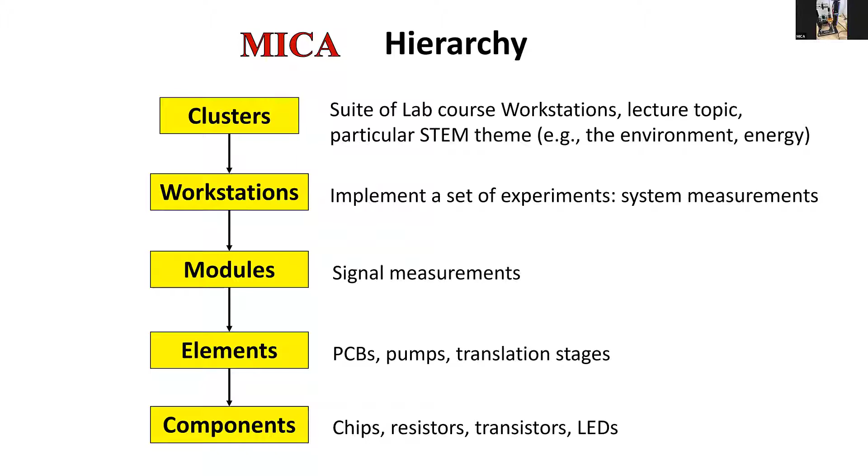So we think of MICA as being a hierarchical system where we go from the lab course workstations, the benchtop systems that students can interact with that may be focused around a particular STEM theme, the environment or energy. Then we have modules that encompass the capacity to signal measurements. We have elements, and then we have components.

And so these are examples of various mechanical components that we would have in a MICA workstation, the motors and actuators that we may need depending on the particular focus of that workstation, the hydraulic components, optical components, again, depending on the particular system that we've developed, and then the various electronic systems that we've used.

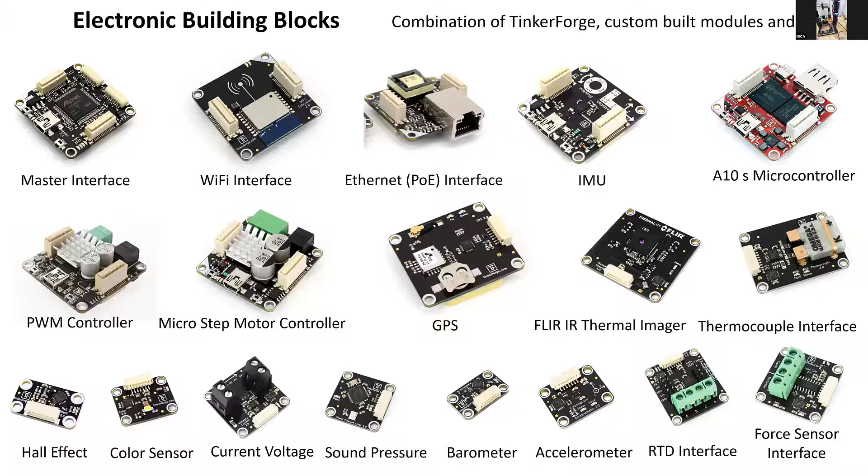We use both TinkerForge and custom-built modules that enable us to control motors, to acquire thermal images, to make measurements of sound pressure, atmospheric pressure, accelerometers, and so on.

The structural components are Misumi elements that we can put together using brackets to give, again, a footprint that is standard. A maximum size then enables us to put these together in a way that they can be shipped and sent to particular places if we need to provide them to other researchers who are interested in using them.

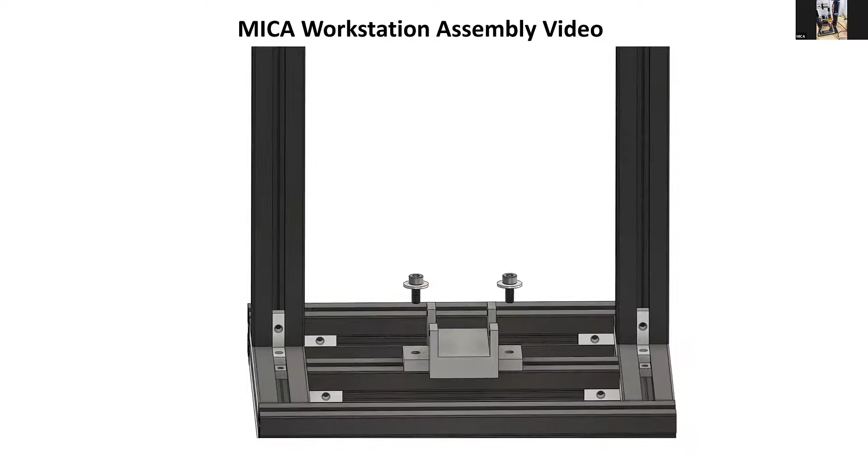Now this here shows that particular workstation being built in a CAD environment. So for those courses where you want the students to actually build the workstation that they're about to use to perform experiments, we can provide you either with a video like you're seeing now of it being built, or even better still, a CAD model.

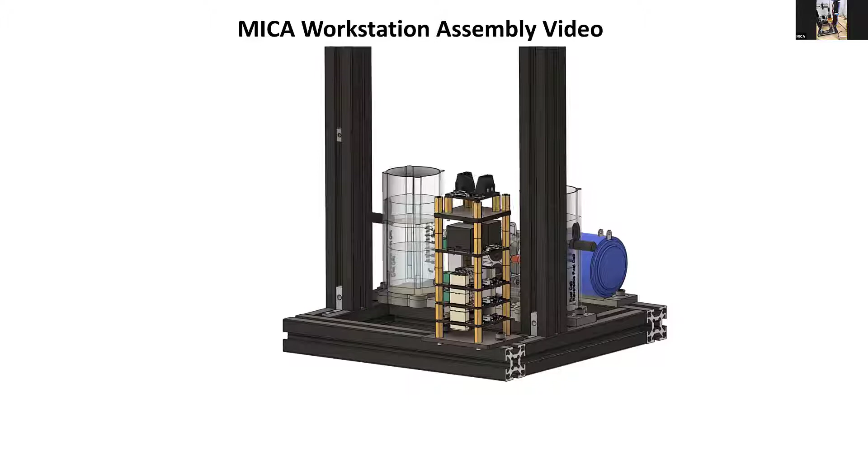In the CAD system, it'll show you the system being built. That allows you to start and stop it, which you can do in this video, but also if you want to zoom in or move around, doing this in a CAD environment rather than via video is way preferable.

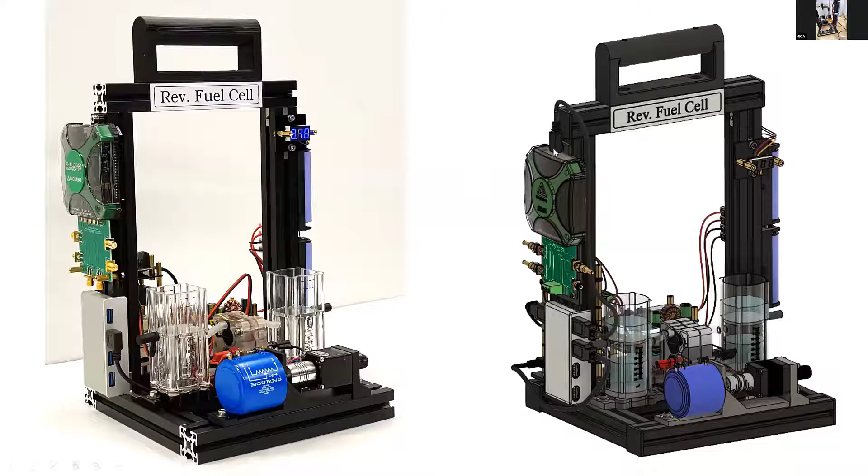We've also been experimenting with the use of Google Glasses and other 3D displays to enhance the three-dimensional visualization of these workstations. So this is an example on the left of the actual workstation that was built, and on your right is the CAD model of that workstation. You can see in the CAD model, we've got even the wiring present in the model.

All of the workstations are driven normally just with two 21700 cells. These are the cells that are coming off Elon Musk's battery manufacturing gigafactory. And what's interesting about them is they're 50 kilojoules each. So with two of them, you've got 100 kilojoules.

For some of the setups, this is nice because students, if they know how much power is being consumed during an experiment, can calculate how many joules you have left in the batteries. So it allows the students to start thinking about some of the system level issues around energy management. Here's just a close-up of part of that workstation.

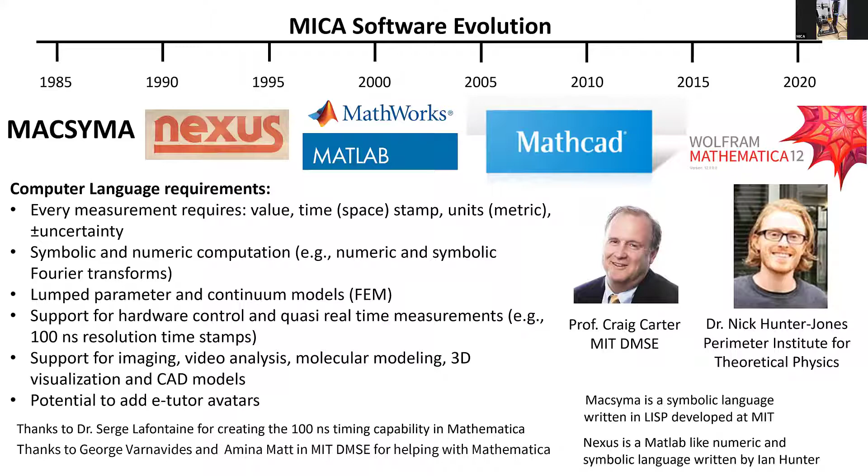I'll just skip over that, it's not necessary. This slide is really just to drive home the key modeling needs that we have: the need for lump parameter models, such as you'd have in typical control systems, Bode plots and transfer functions, and then for nonlinear lumped parameter dynamic modeling, Volterra series expansion, Volterra kernels.

We also wanted to make sure that we had continuum modeling, finite element modeling, and Mathematica in particular has very recently got a relatively powerful finite element modeling capability, which interestingly, most finite element modeling packages are numeric. Think of computational fluid dynamics being entirely numeric.

Mathematica, because of its symbolic capability, allows you to have combinations of continuum models that are solved numerically and, for a more limited set of cases, symbolically and therefore exactly. You can do molecular modeling, DFT, as well as neural nets and deep learning.

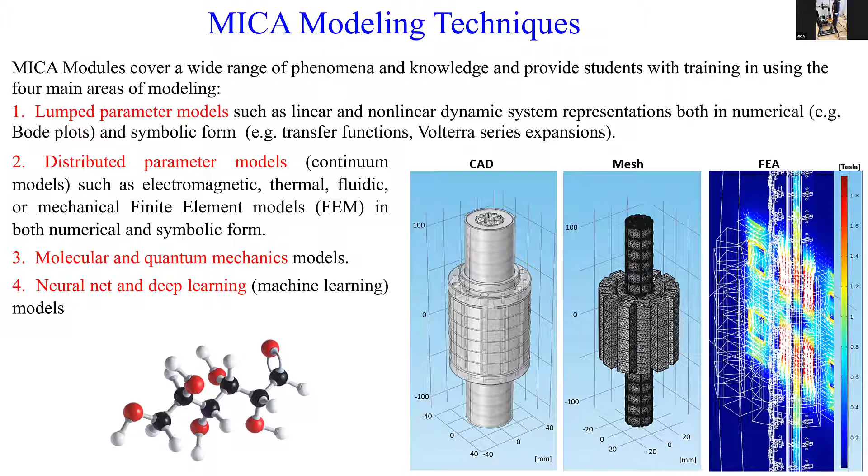The virtual tutor is something that we're working on. It's going to take some while. We're pairing up with Weta, the New Zealand company famous for its work on Lord of the Rings, Planet of the Apes, Avatar and a whole bunch of other movies. So we're working to see if we can use that Hollywood-style realism achieved in those movies to bring that into MICA as a virtual tutor.

I might add, our ultimate goal in MICA is to eliminate the need for traditional exams or multi-choice tests, and to use the actual physical workstations where students are running experiments, but where the workstations can pose questions and effectively perform experiments on the students, so that the workstation itself starts building a model of the student's knowledge in a particular area.

So we like to think that eventually the e-tutors are not only there to help with the teaching and to resolve questions, but also that the e-tutor is busily modeling the student's knowledge and trying to learn their preferences, so that if, for example, you're keen on music, then perhaps you teach periodic phenomena and resonance via music, whereas if you're into sports or something else, the method by which you're presented material would be somewhat different.

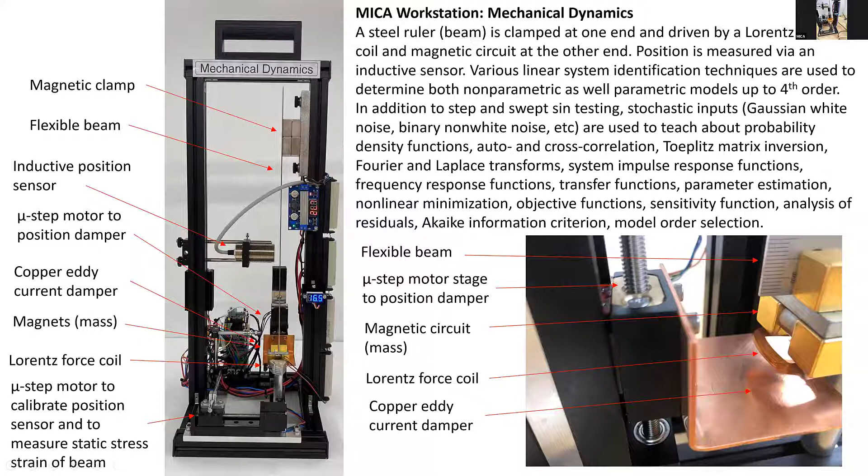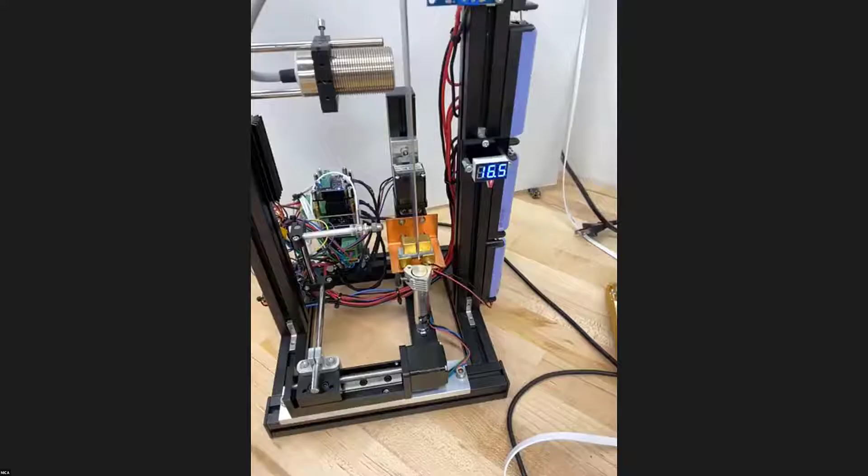So I'm now going to do a demo of this. I'm just going to stop the share screen and move over to the Mathematica analysis environment, which is actually going to run the experiment. Then in the other screen, labeled MICA, you're going to see the actual setup.

So maybe if we can just switch over to the MICA screen so we can see the experiment being run. Ian, I think you might need to stop sharing your screen for that to work. All right, I'll do a stop share. Ah, there we go, excellent.

So this is the beam here that's got the Lorentz force actuator on the end of it, and we're now actually going to generate a stochastic binary signal that's going to be used to do a dynamic experiment on that beam, and then we're going to use linear system identification techniques to actually characterize the behavior of that system.

So if we can now go back to the other screen, we'll bring up the lecture notes. There we go. So this is what the student would see. There's a little bit of background that they would go through.

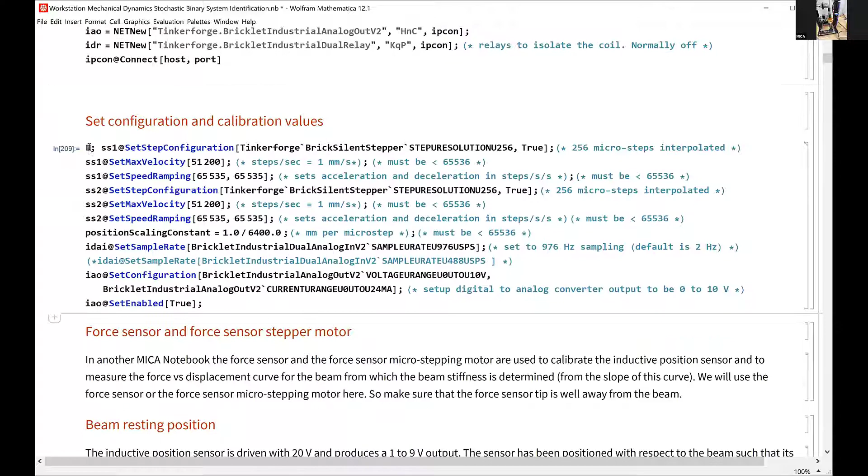Here, what we're doing is making, we're going to analyze these data, run the experiment and then analyze the data in real time. We're just setting up the A to Ds and D to As and the other micro-stepping motors and other entities that we need. We're just checking that we've got an offset that is roughly 5 volts, offset voltage.

And now we're just going to do a quick measurement to get the baseline noise measurements of this system. And here they are, right here.

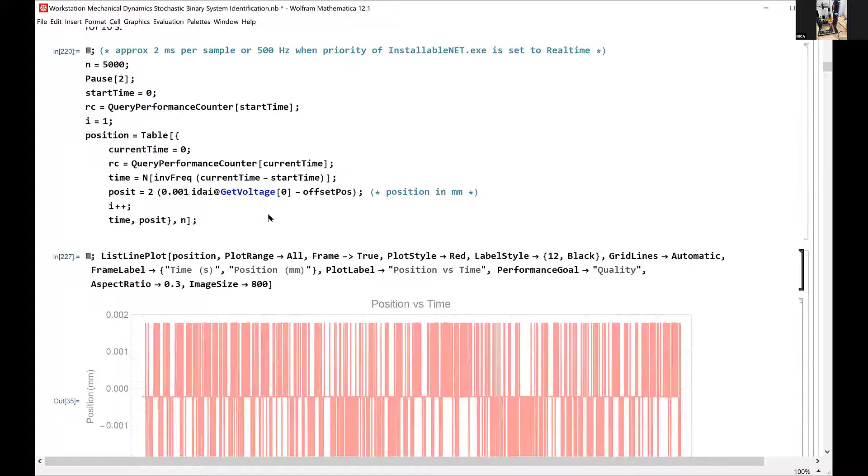So just so that this is truly in real time, I'm going to delete all the output here and rerun that, because I want to show you that we're actually gathering and analyzing the data in real time.

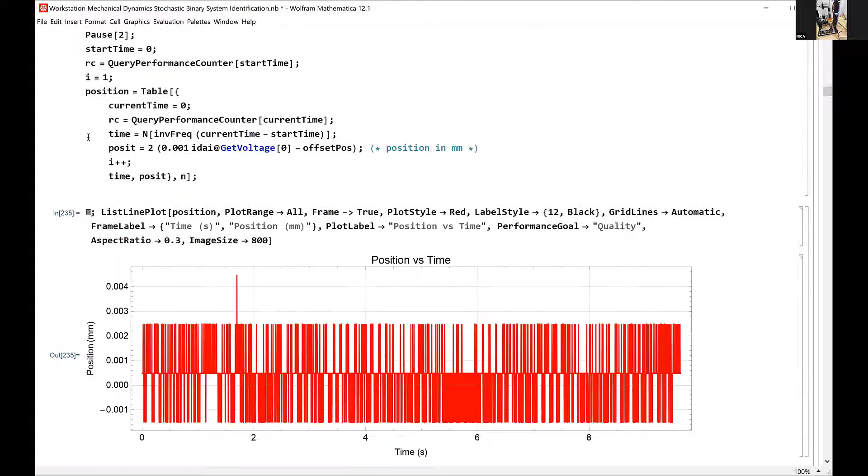Okay, so there's what we just collected, and that looks like bit noise, which is what it should be, because our noise levels are on the order of 1 micrometer. So that's down, plus or minus a bit, in terms of the position sensor.

Now we're going to generate some Gaussian white noise. We've just done that, and we're going to low pass filter it. So here we're defining a second order Butterworth filter, and here we're just showing the gain part of the Bode plot of that filter.

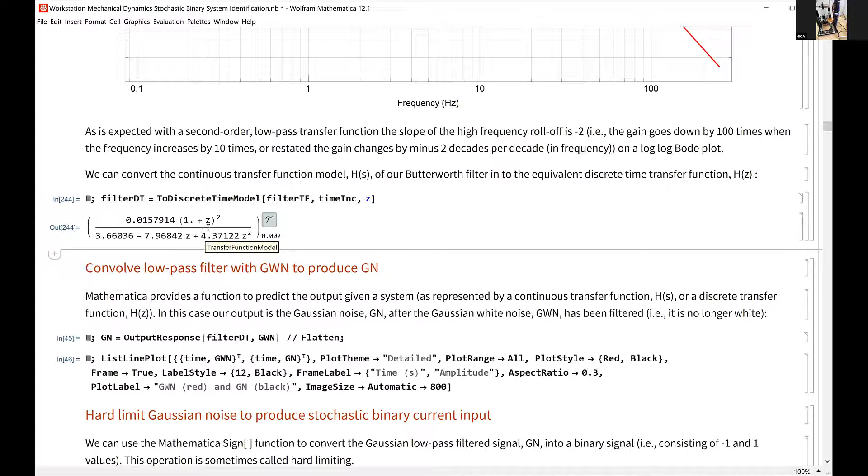And now we pass the Gaussian white noise through that filter to produce Gaussian non-white noise. Here we're just doing that convolution. So in black there is now the Gaussian non-white noise.

And we're now going to hard limit that to turn it into a binary signal. So in red there, you can see the hard limited binary stochastic signal, so that's binary non-white noise. And that is what we're going to pass as a current into the Lorentz force actuator to produce a non-white binary force applied to that beam.

So this is the actual input that we're about to deliver. And now we're going to run the experiment.

If we can just flip to the other screen, maybe I have to stop share again. If we can go to the MICA screen, perfect. And then I'm going to try and get back to screen and start the experiment.

Okay, and now you can see it moving. That's as a result of a stochastic binary current being applied to the Lorentz force actuator. It's not a large movement, but it's sufficient to characterize the dynamic behavior of this system.

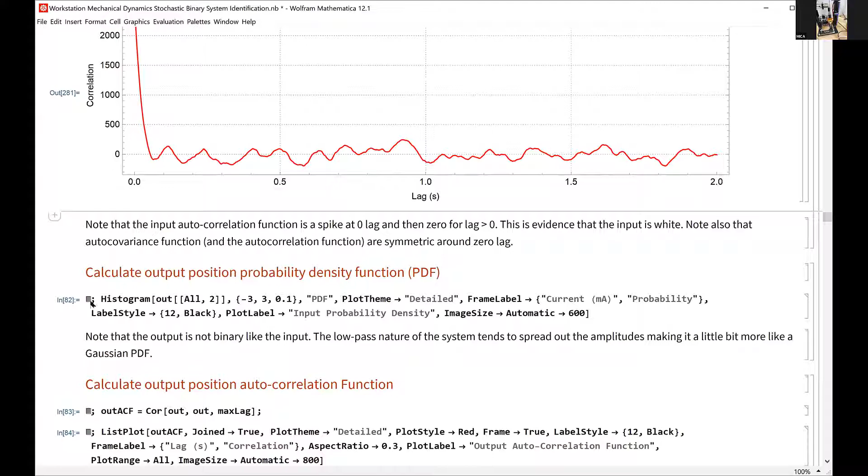Here it is right here. So that's the input autocorrelation function, I should say. And here's the output probability density function.

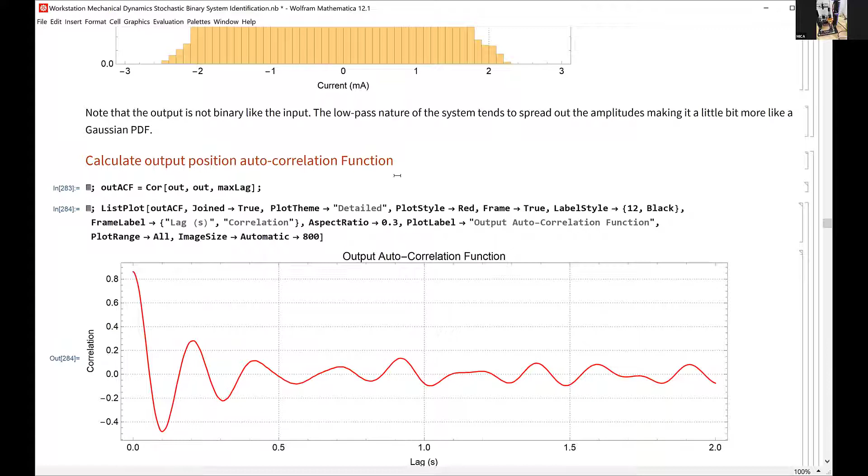We can compute, although we don't need it, it turns out we can compute the output autocorrelation function. Of course, the Fourier transform of that is the output power spectrum.

Now we compute the input-output cross-correlation function. Here it is right here.

And so now we use Toeplitz matrix formulation to deconvolve the input autocorrelation function from the input-output cross-correlation function to yield an estimate of the system impulse response function. And here it is right here.

So you can see that this measured impulse response function, which is calculated not by putting an impulse in, but rather by putting a stochastic continuous input in, and then using linear system identification techniques to determine the impulse response function. Of course, the Fourier transform of this would be the frequency response function.

And remember, we haven't modeled this as yet. This is just a non-parametric measurement. You can see that it's got some second order behavior, and there's an oscillation on top that may be evidence of even higher order behavior from this beam.

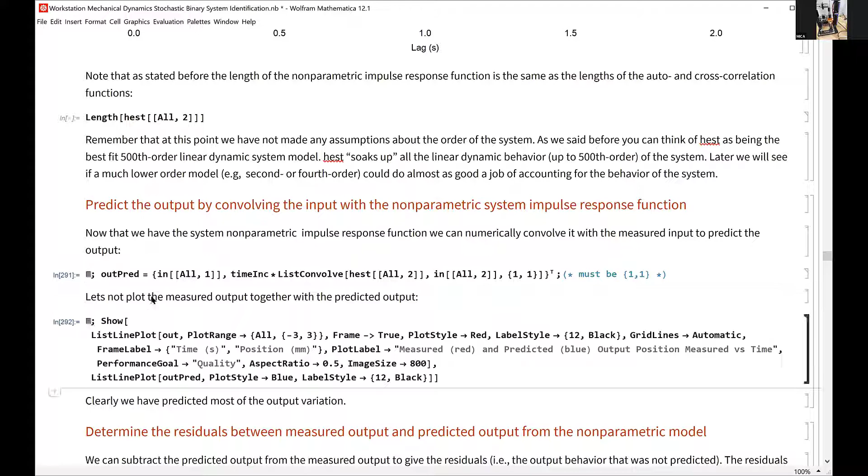And it turns out that that oscillation is in fact a higher order mode of oscillation of that beam that would show up if we did, for example, a mechanical dynamic finite element analysis of the beam.

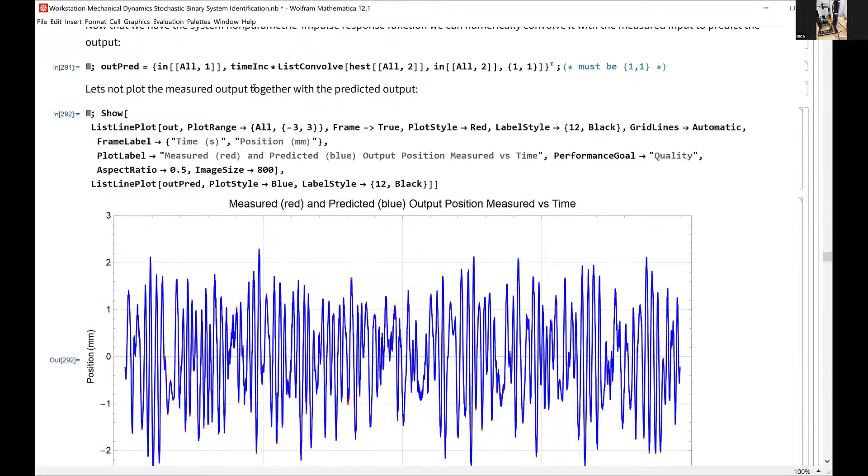So here, what we've done is we've convolved the impulse response function with the input to make a prediction of the output. And we've plotted the predicted output and the measured output, and they're almost identical.

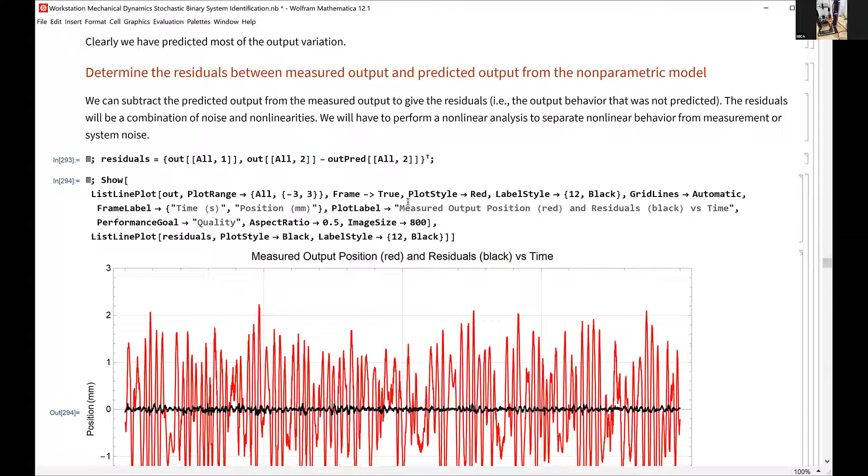So for many students, this will be the first time that they realize the power of linear system identification techniques to make a prediction of the output of a system, even when it's perturbed by a wild input, such as we've used here, a stochastic binary input.

And here we've computed the residuals, and you can see that the residuals are very low, indicating that we've made a pretty good prediction. We can compute the variance accounted for, the percentage of the variance of the output that is accounted for by the linear dynamic model.

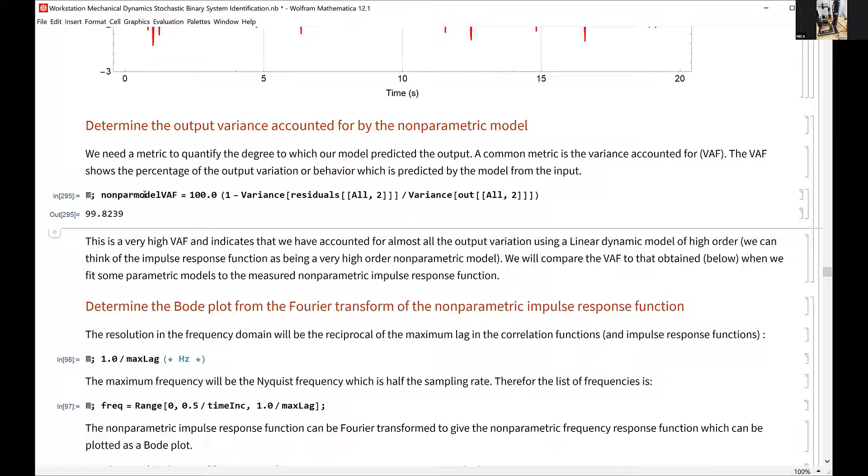Remember, this model is non-parametric. We haven't said that it was first, second order, or whatever, but we've accounted for 99.8% of the variance. So this would be a clear indication that there would be no reason to go to a nonlinear dynamic analysis, because almost all of the behavior of this system is characterized by a non-parametric linear dynamic model.

So now we go through and compute the frequency response function shown here, because remember, once we've got the non-parametric impulse response function, we can Fourier transform that to get the Bode plot, the frequency response, and here it is right here.

So here you can see clearly some second order behavior, but there's something else appearing at about 47 hertz, and that turns out to be the second mode of resonance of that beam.

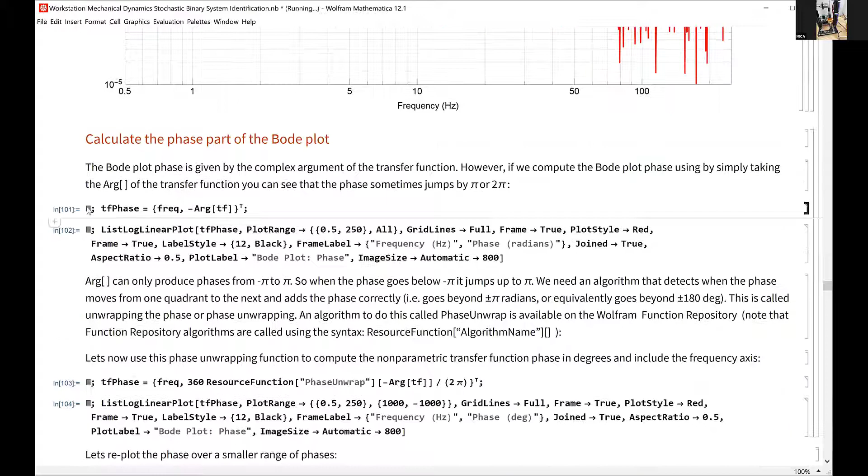So let's have a look at the phase part of the Bode plot. Here students learn that you have to unwrap the phase, so we introduce them to a phase unwrapping algorithm. Now we've unwrapped the phase, and if we zoom in we can see that up to about 30 hertz it's behaving as a second order system, rolling off at about minus 180 degrees, but then at higher frequencies it becomes more complicated.

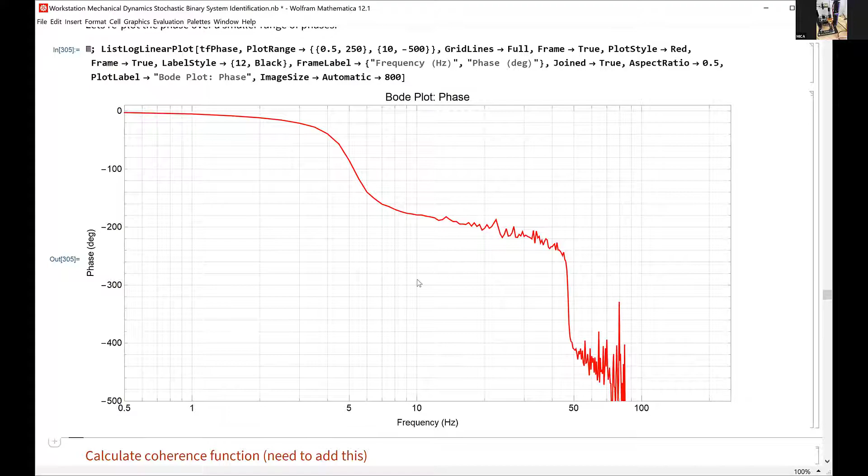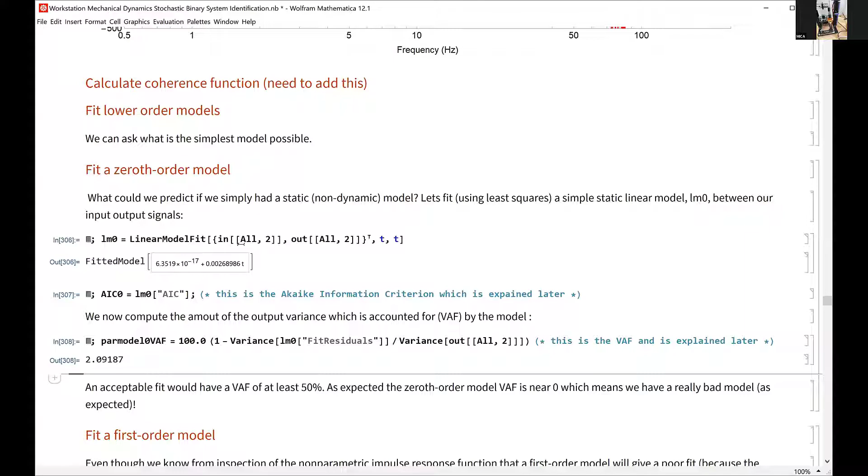But everything we've done so far is with a non-parametric model. We can say, well, what about if we go parametric? How much do we predict if we just have a static model? We've just done exactly that - fitted a static model between the input and the output, and we're only accounting for 2% of the output variance, which is pitiful. So the simplest dynamic model would be a first order linear model, and we go ahead and fit that.

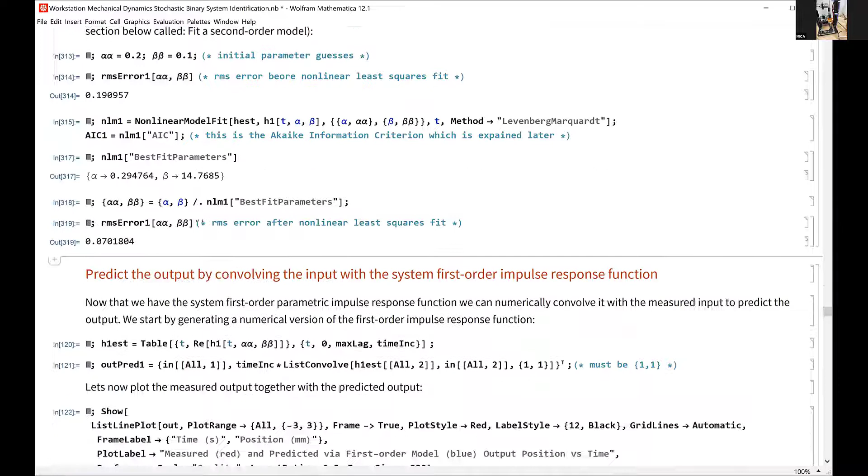In order to fit that, students are introduced to using a nonlinear minimization technique, in this particular case Levenberg-Marquardt minimization. Here is now the prediction in blue together with the actual output, simply using a first order model.

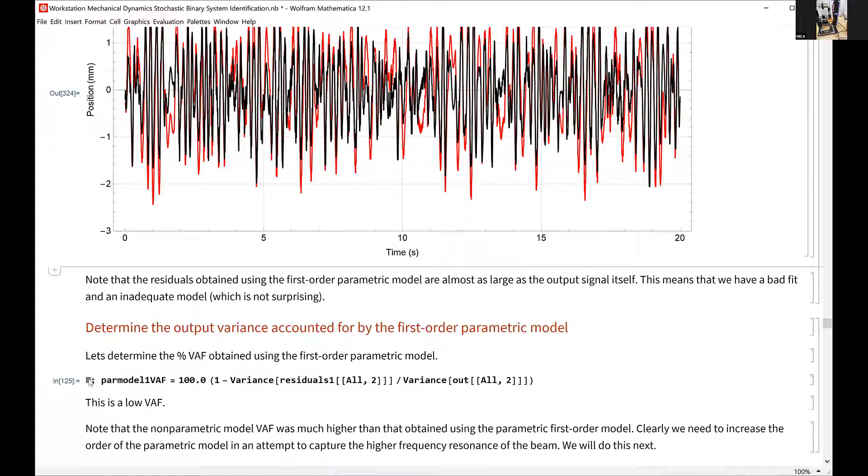So a first order model clearly is not doing very well, but let's look at the residuals - they're almost as big as the output variation itself. Indeed, if we compute the variance accounted for by that linear dynamic model, it's only 37%.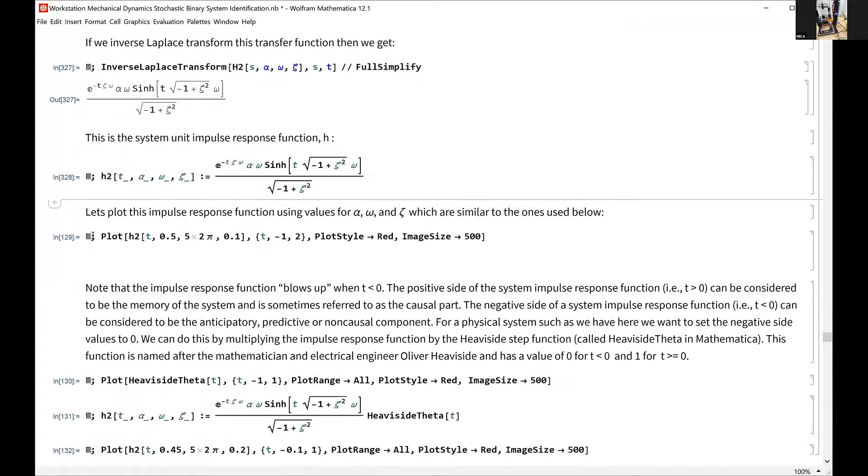So now we fit a second order model. We already suspect that a second order model is going to represent some of the behavior of this system.

Here we're just using the power of a symbolic computer language to be able to go from the general form of a second order transfer function in the Laplace domain and inverse Laplace transform that to get a symbolic impulse response function, which we've just plotted. We'll go ahead and now fit that to the data.

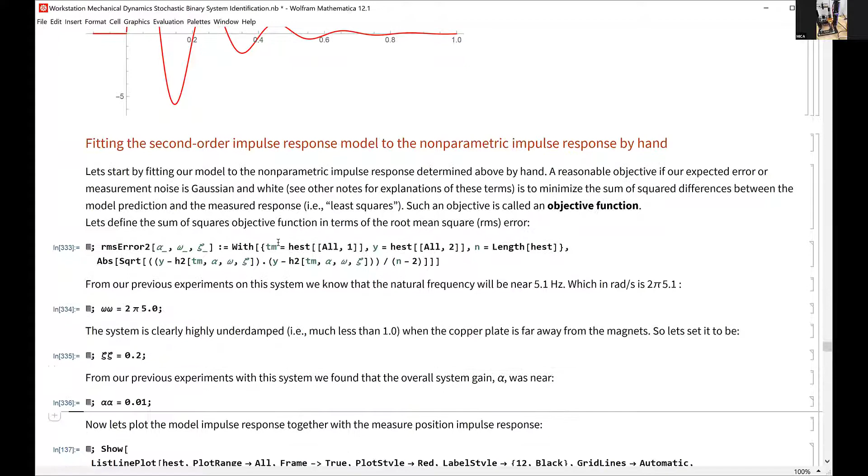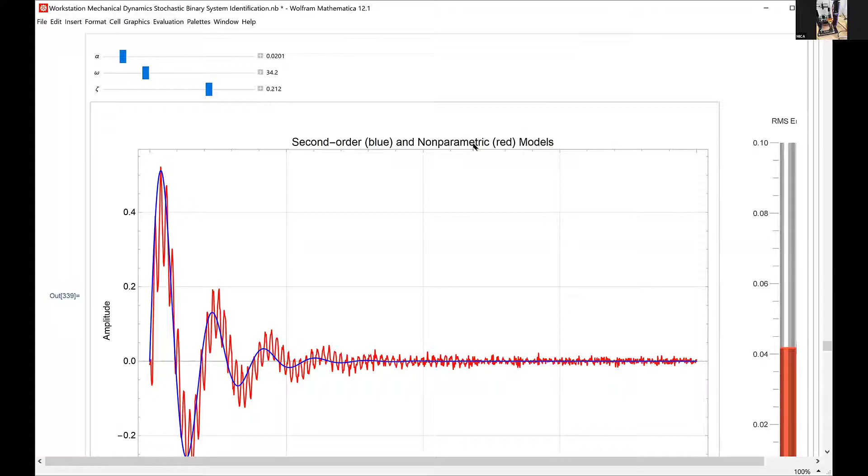This is actually not a fit as yet, just trying some parameters. Here what we're doing is allowing students to vary the gain manually, the natural frequency manually, and the damping parameter to try and fit by hand. You can see the sum of squares fit shown on the other side. So it's always good to allow students to go ahead and manually fit a model.

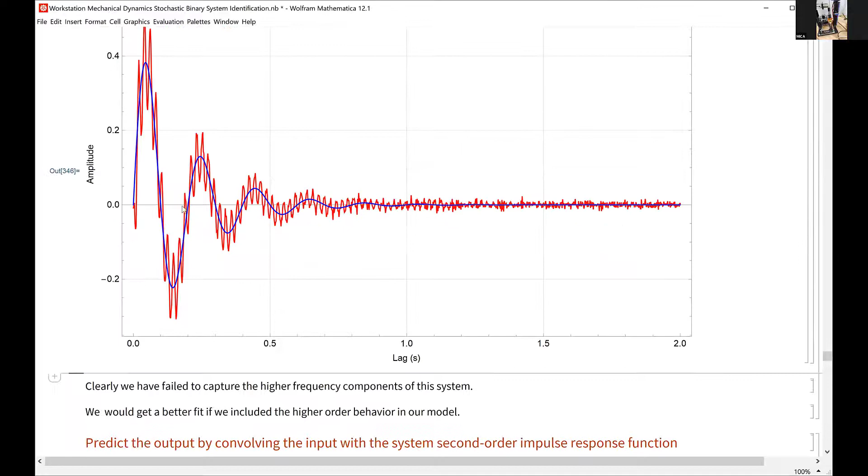But now we go ahead and do that automatically using Levenberg-Marquardt nonlinear minimization. Here's the best fit second order model shown in blue, but we've clearly failed to capture this higher order behavior of this system.

So this is the prediction of the second order model. It does a pretty good job, and here's the residuals, not quite as low as our non-parametric model. We've accounted for 98% of the variance.

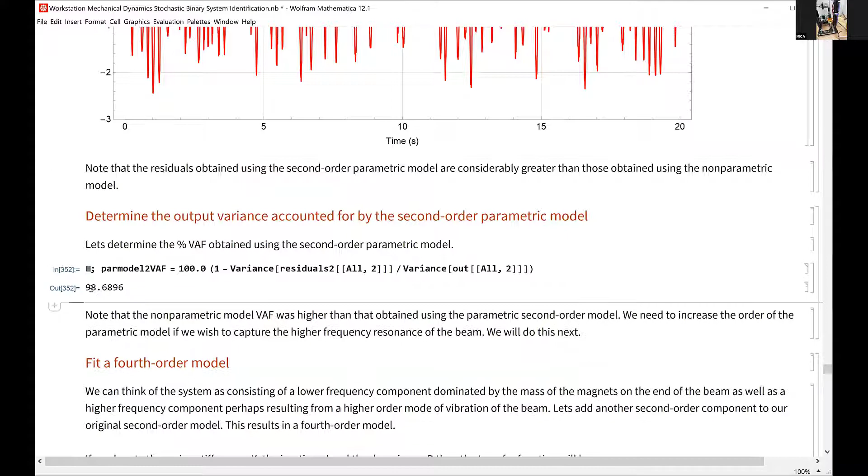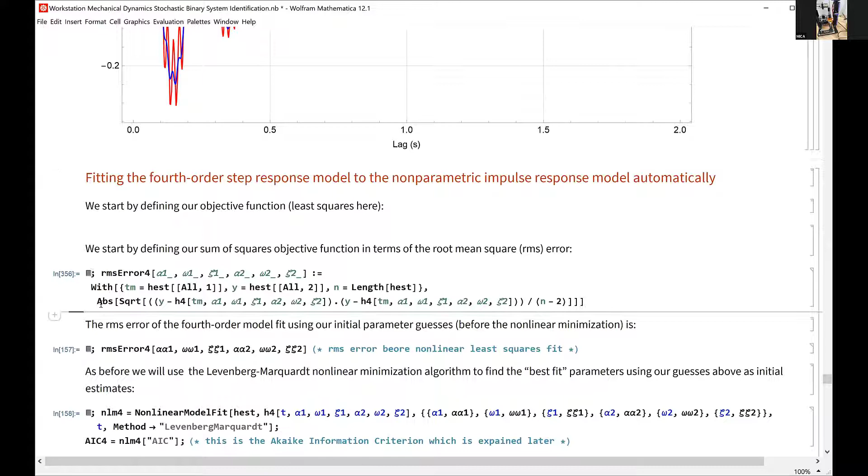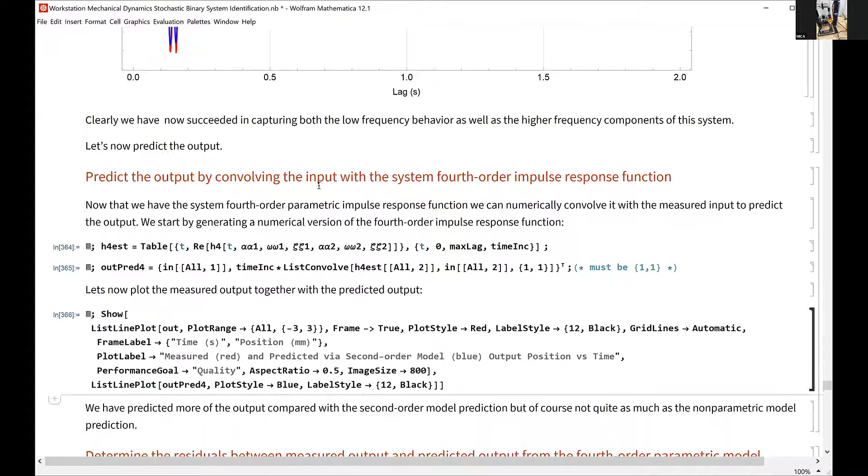Now we go ahead and fit a fourth order model to see if we can pick up the higher order behavior of this system. I'm going through this way faster than you'd normally go with a student, of course. There we fitted the fourth order model, and it's doing a remarkably good job in predicting the output, almost as good as the non-parametric model.

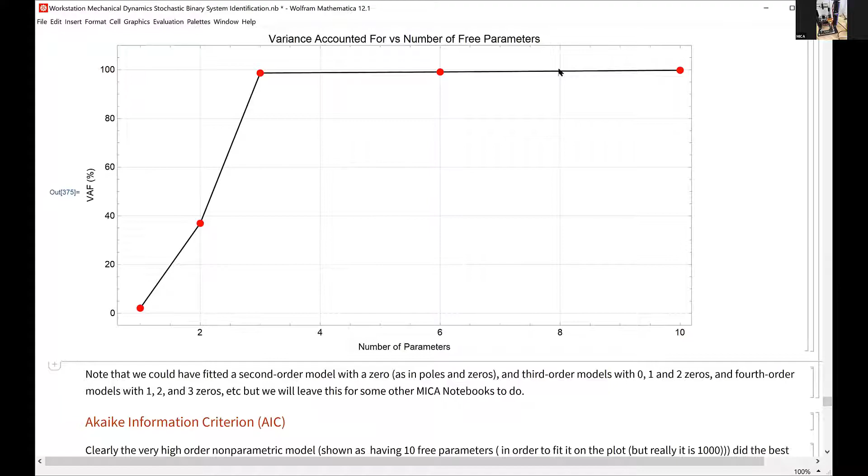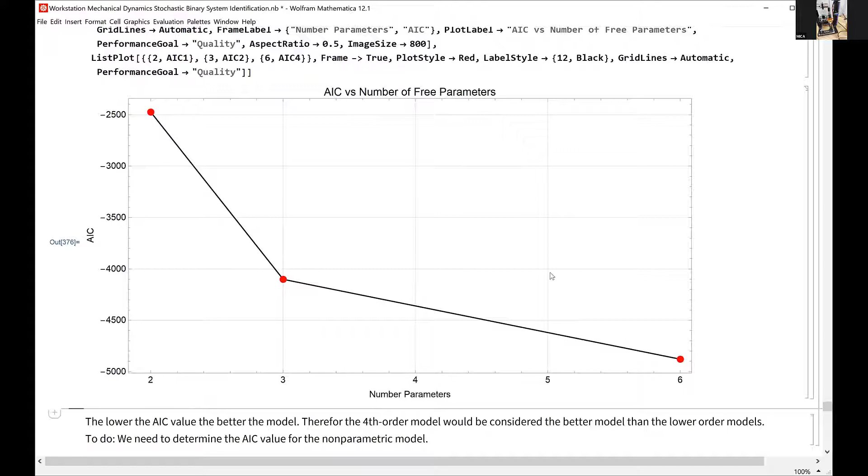So here we would then just quickly compare a static model with a first order model, with a second order model, with a fourth order model, and with the non-parametric model, and plot the variance accounted for. Variance accounted for doesn't punish you for over-parameterizing the model, so we can use the AIC information criteria for that. The AIC is showing us that the best model is the fourth order model with 6 parameters.

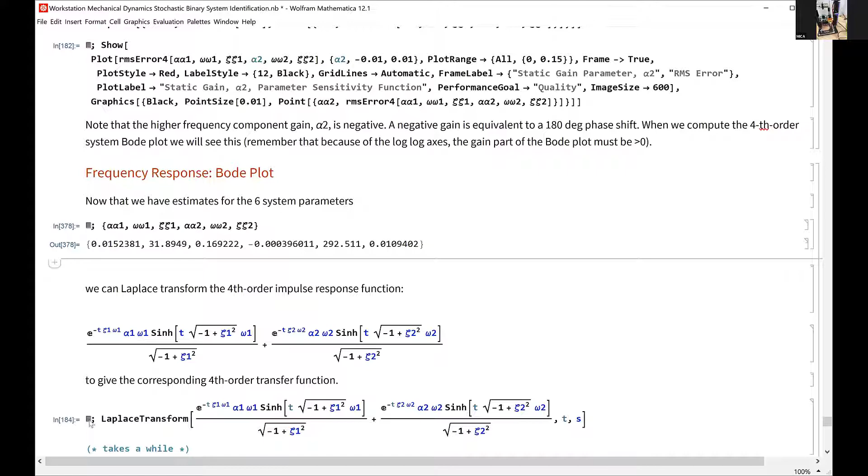We can go and compute parameter sensitivity functions to show what happens as you vary the parameters on each side of the optimum value. I'm not going to go through them all here. Of course, once we've got our fourth order model in parametric form, we can now symbolically Laplace transform that to get the transfer function.

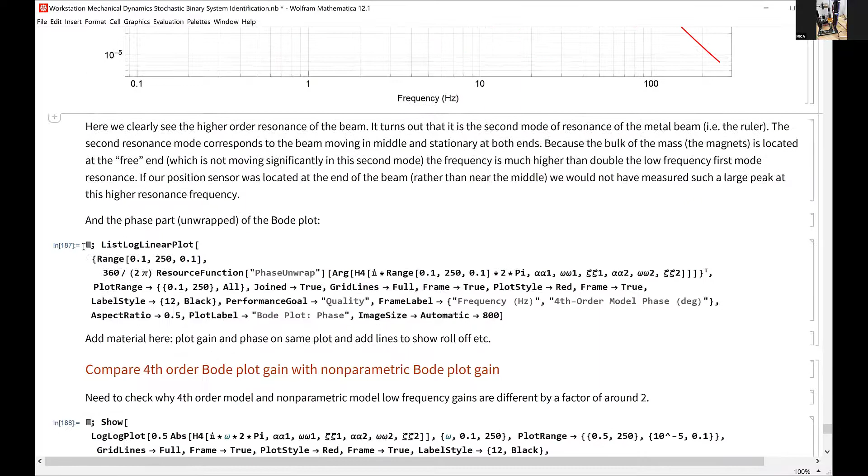It takes a little bit of time to compute that symbolic Laplace transform. But here is the best fit fourth order transfer function to the data, and here's the phase part. Now we can show the fitted fourth order model together with the actual measured frequency response function. That's a quick example of the analysis environment we're providing with the MICA setups.

In the last few minutes of the presentation, let's see if I can bring this up. Okay, so this is an example of a portable MICA setup where we had a second order low pass filter, a Sallen-Key analog second order filter, that students were sent because of COVID-19. They performed system identification to try and determine the symbolic model for that particular system.

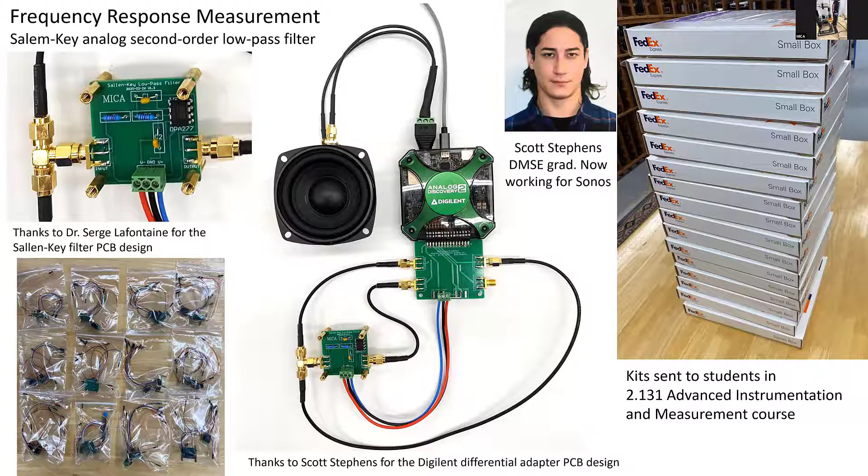What about if we truly have to run MICA remotely? We've put into the MICA setups the ability to be run over power over Ethernet. If we were just running them on batteries, they would go flat after a period of time. But by having a combination of batteries to provide brief high currents together with power over Ethernet, we're able to run these continuously without having to change batteries. That's something we're currently experimenting with.

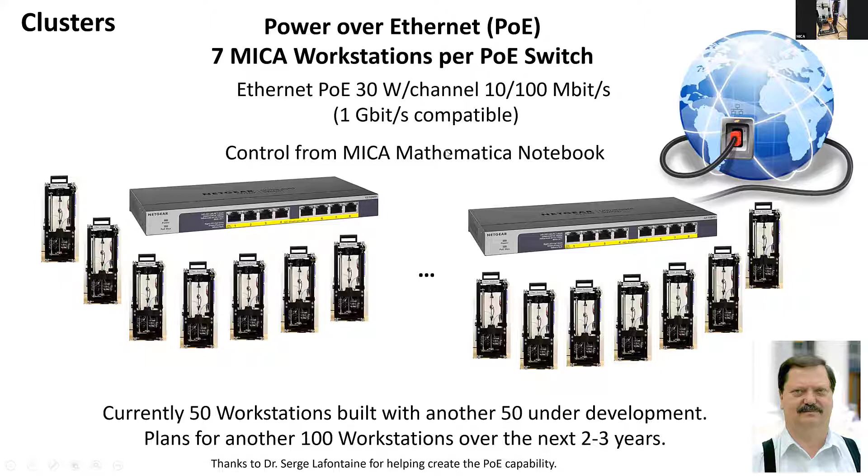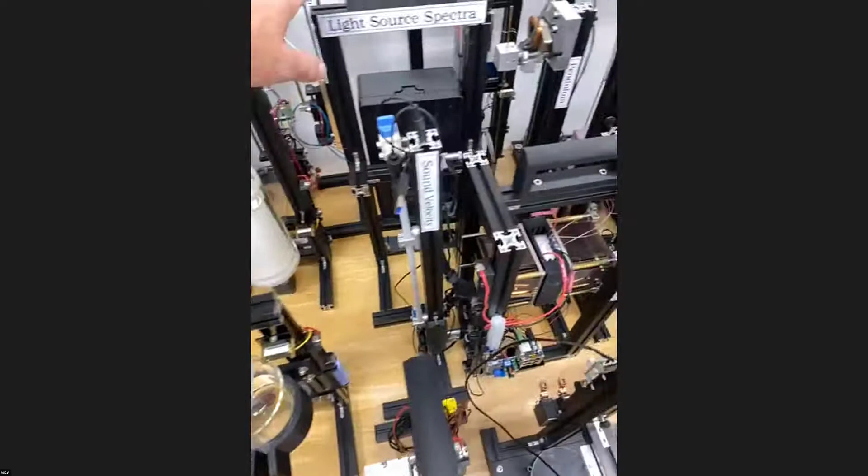Okay, so you can see here some of the MICA setups: something to measure viscous drag and viscous unmixing, light source spectra, magnetic fields, gas laws, heat capacity, vibrations, springs, sound velocity measurements, temperature measurements, friction, Seebeck effect, and this particular one here is the fiber analysis setup that I mentioned before.

We're also building them for use in biology, so this is a bacterial growth setup. Here we have all the main methods of cooking being compared on the one setup, so induction heating based cooking and Joule heating.

Here we have tensile testing, a water analysis setup, and a catenary setup, so that if you're teaching the mathematics of fitting a model to a measured phenomena, in this case a hanging chain, a catenary.

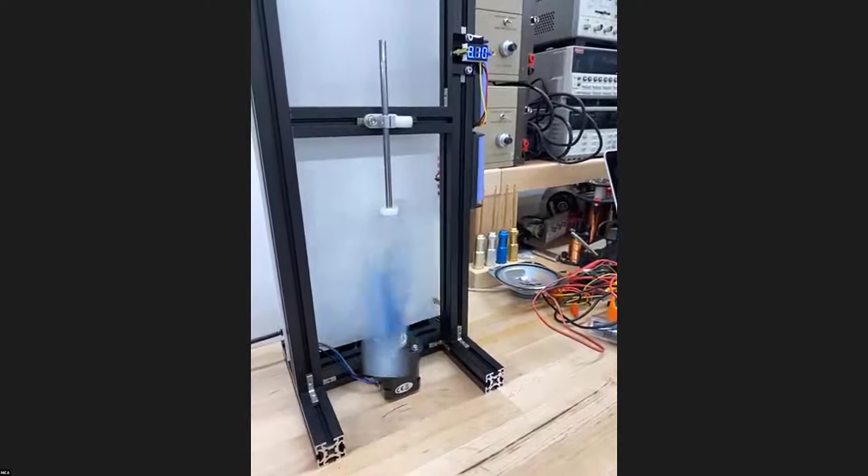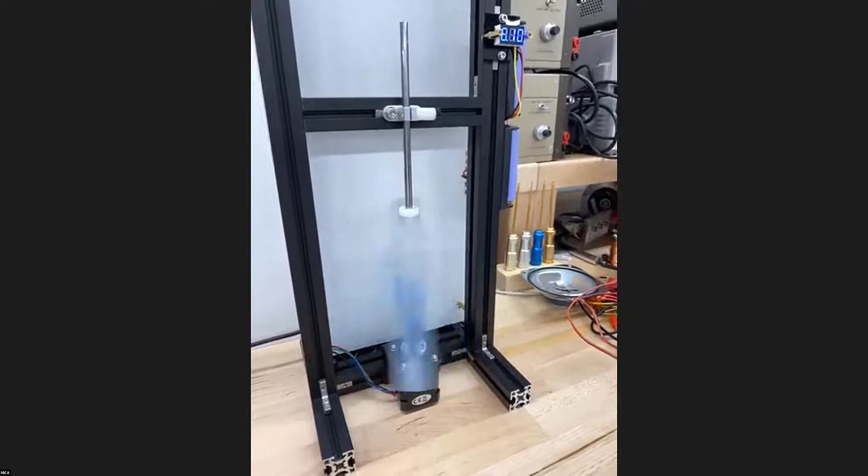We have ones that are more suitable for use in teaching math. So this particular one here, we have a 240 frame per second camera looking at that, and if you pull out a frame when it's normal to the camera, and use image processing and fitting techniques, students can discover that that shape is a parabola. You can change the speed of this to create different parabolas.

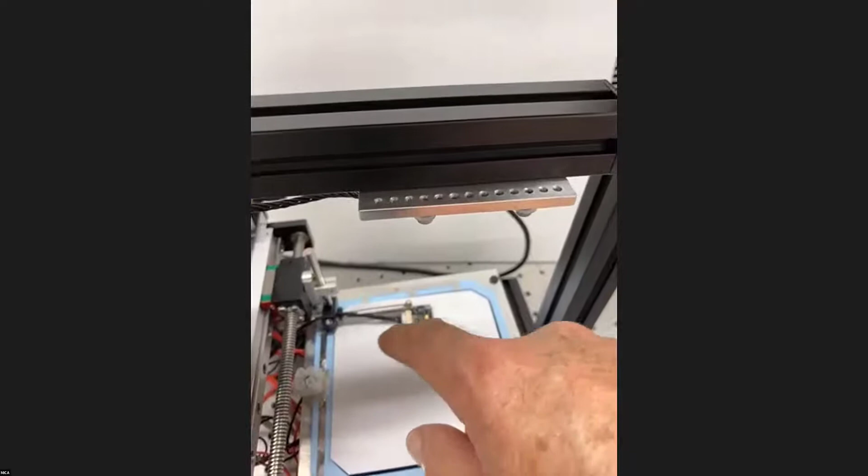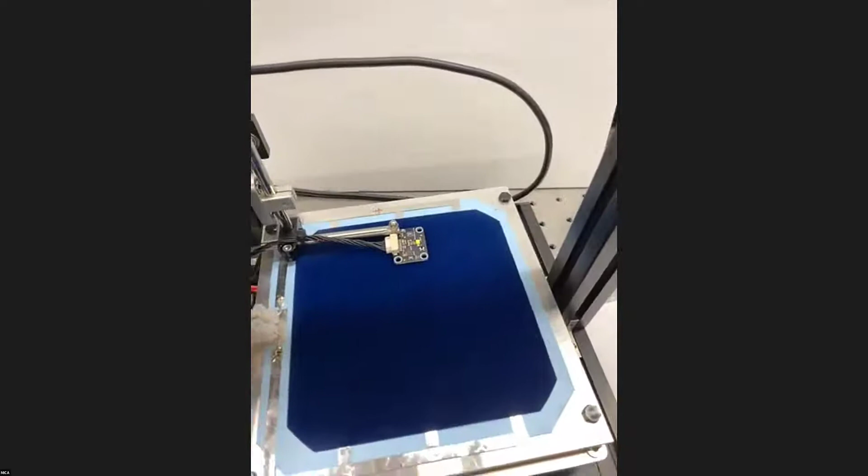And here's another nice one, solar cell. We have an LED array capable of producing about 120,000 lux on the surface here, more than the 100,000 lux of sunlight at noon. We actually have a thermal camera looking down on this solar panel to look at the thermal distribution. There's an array of Peltier effect coolers underneath so students can measure the efficiency of the solar panel as a function of its temperature. As before, students can vary the load seen by the solar panel in order to optimize energy per unit time extraction from it.

And once again, we have a micro-stepping motor, so that this can be manipulated remotely should the student not be in front of the setup.

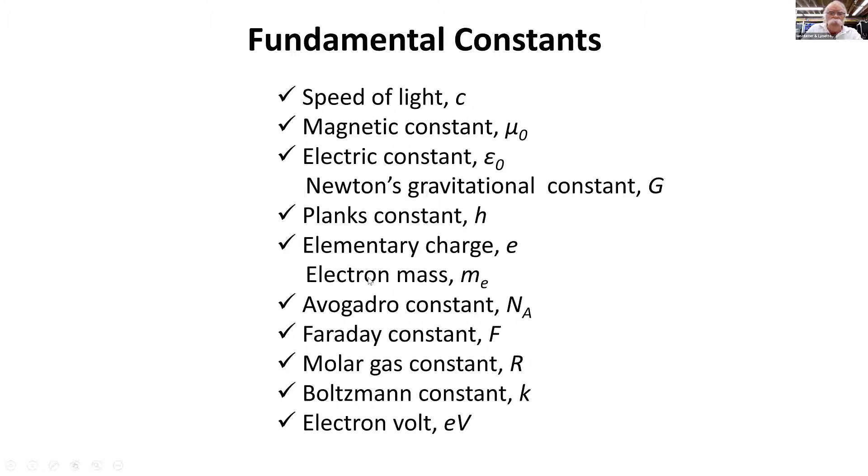For example, if we look across the different MICA setups, these are the fundamental constants that one or another of the MICA setups is measuring. We're about to add Newton's gravitational constant via a Cavendish experiment, electron mass via a Bainbridge setup, as well as a Millikan oil drop MICA setup.

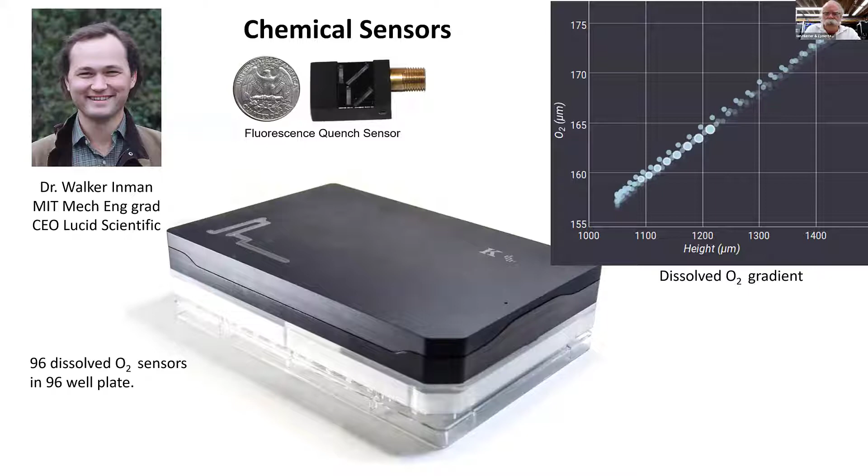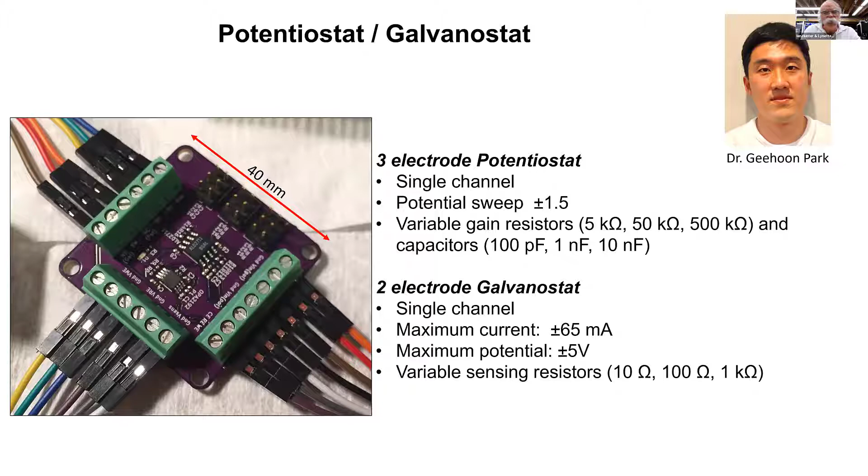We have, again, a nice fluorescence quench sensor using linear system identification techniques. A potentiostat and a galvanostat, more for use in material science and chemistry. We have a miniature gas chromatograph, actually a pretty high resolution gas chromatograph.

And we're working with Professor Khalil, who I think is on this call, on a couple of different optical physics-based setups, including one involving a Mach-Zehnder interferometer and the measurement of the output from a tungsten filament, as well as to measure the spectral output from the sun as measured outside on a sunny day.

So that completes our presentation. So I think, Lynette, if you can join me and we'll take any questions.

Yes, I think there's one question that I think would be good to address before transitioning to Dr. Dia. One person asked about the number of connections that could be made within a MICA workstation and how you might manage large numbers of students in the classroom.

Yes, so that's something we've put quite a bit of time into and haven't completely resolved as yet. So at the moment, with the power over Ethernet, first of all, if each student has their own notebook computer, and that notebook computer is directly connected to a MICA workstation, you can have thousands. There is no limit. The limit becomes when now you want to set up a remote classroom, perhaps with 100 different MICA workstations.

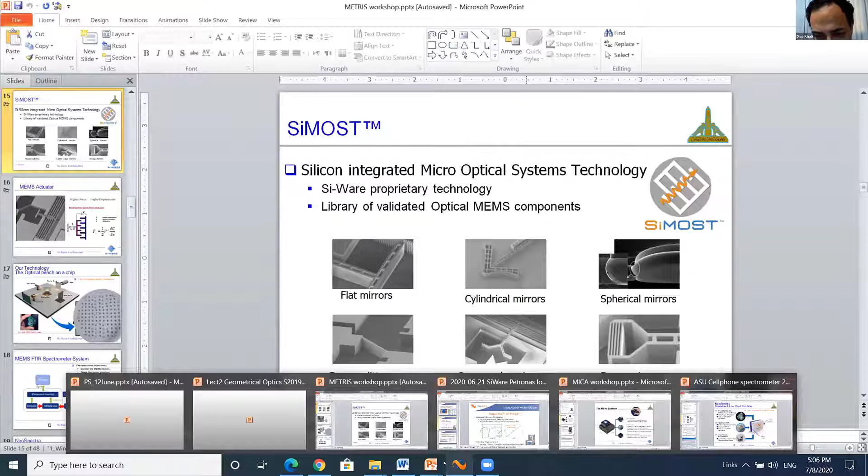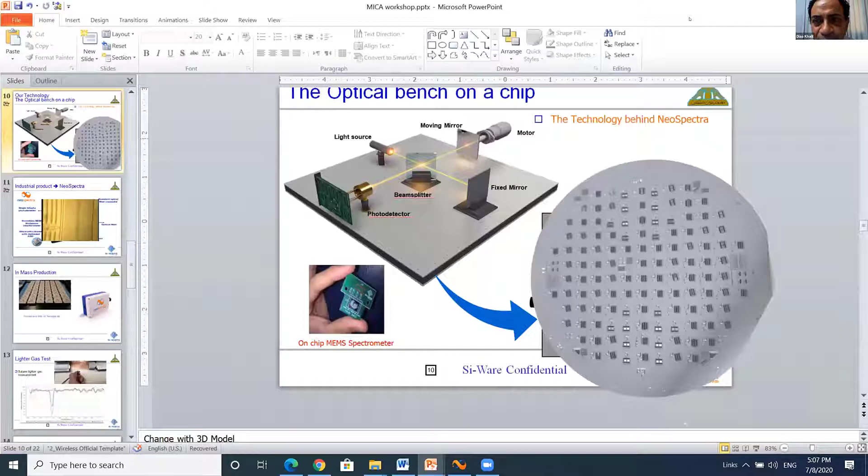I don't know if I have the right to share the screen. Can I share my screen? Robert, can you give Professor Dia that right? I'll try and see. Okay, there we go. So can you see my screen now? I can, yes. So it should be. Okay.

Okay, so it's not 5 minutes, 10 minutes maximum to present our miniaturized FTIR spectrometers that should be integrated with the MICA platform. This was part of our research project for the MIT Center of Excellence.

This has been based on the fact that we believe the internet is now going everywhere, and its reach all over the world is increasing with time. And it's not only all over the world, it's also in Egypt. The number of internet users in Egypt is more than 54% of the population, and it's increasing with time. Maybe the quality of the service itself is not as high as we want, but the reach is huge, and Egypt is actually one of the top 20 countries with respect to the number of internet users all over the world.

And there is a transformation in the internet service now all over the world, from just an internet of information to an internet of interactions. And that's what we call the IoT, the Internet of Things.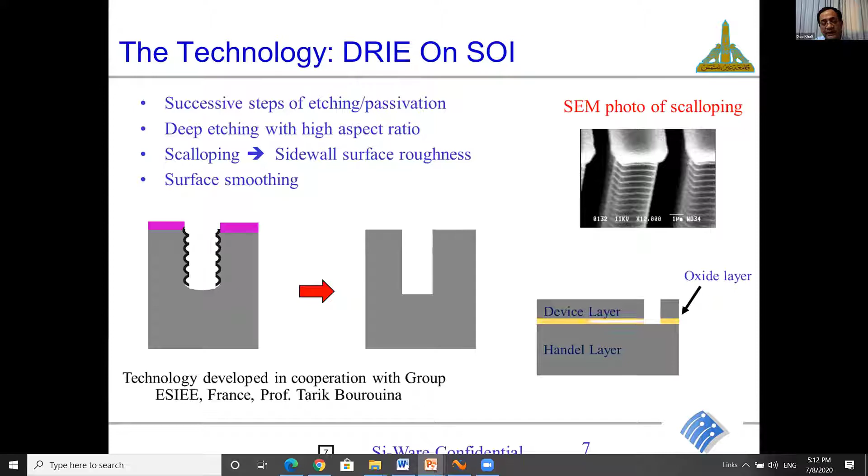So we have been working on what we call deep reactive ion etching technology on SOI, which allows us to make mechanical and optical components on chip. With these components, we can build an optical system. This is an example of an optical system composed of beam splitters, a fixed mirror and moving mirrors, and of course a light source to feed this system.

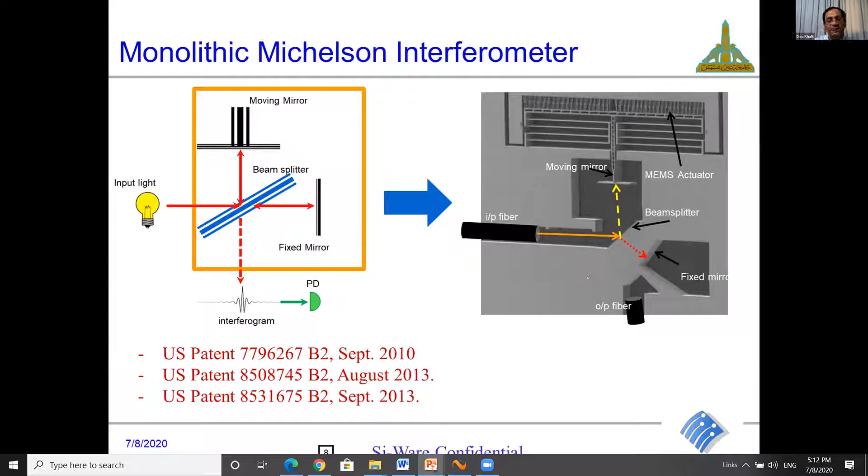And this is how this system will look in practice. It will be some millimeters in dimensions, with an actuator, the element that makes the mirror move, and the beam splitters. Then you can have the input and output either by fiber or free space coupling, and free space is actually preferred.

The idea of the actuator is quite simple: it's just a capacitor with a complex configuration to increase the area of interaction and reduce the distance, so you can increase the energy stored by the system. This is how it looks in practice—this is the comb. You have hundreds of fingers interleaved together, and you have a spring, which allows the mirror to restore to its actual position.

And this is a mirror, and this is a typical beam splitter. All the optical systems will be in the rest of the components. So by this technology, we can replace what we build on optical systems or an optical table into a simple small chip. And then this will be part of a die of a complete wafer. So we can fabricate hundreds of these, 400, 500 of these optical systems. And with the aid of the electronics, we can make the controls, the data processing, the analysis, and all these requirements.

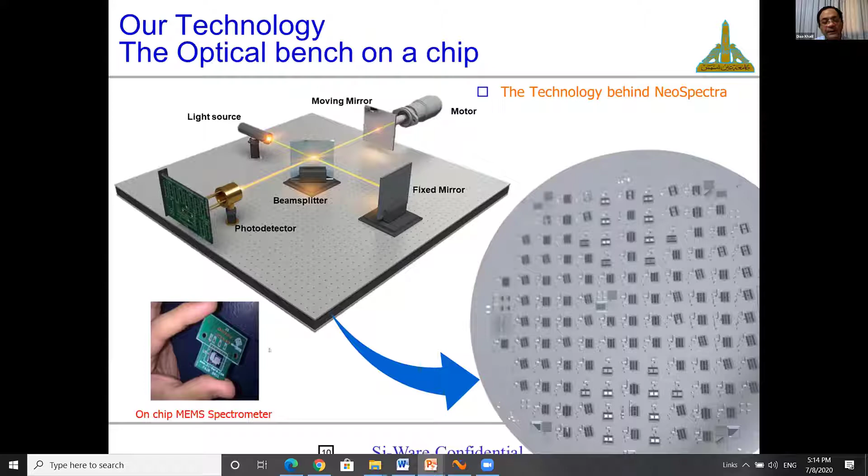This results in the first version of these spectrometers, in which we have all the optical system on this chip connected by optical fiber and some electronic components for data processing, for the analysis, for the control, and so on. And this is how it looks like and how it's produced in mass production.

Then we can use this element in building all the experiments, very simple experiments. It will be quite compatible with the MICA process. The dimension of these spectrometers is typically the dimension of a credit card, with a thickness of about 1 centimeter for this first version.

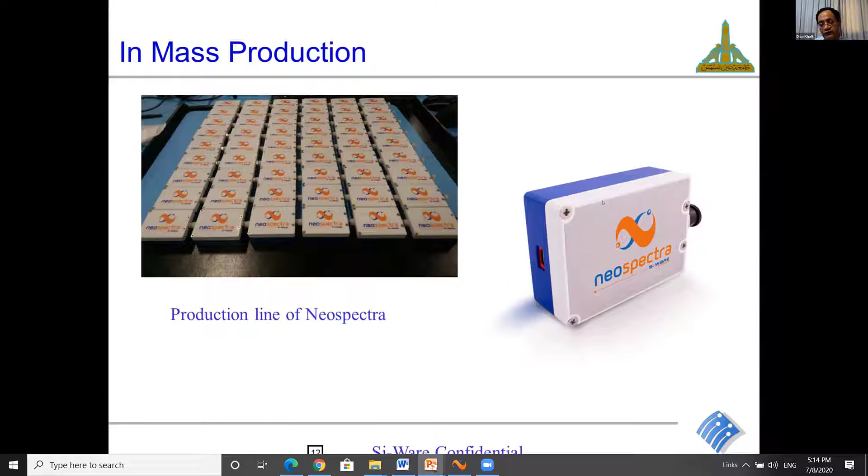Here is the spectrometer itself, and here's the light source outside just for testing. So we imagine that the dimension here is something in the order of 10 centimeters by 10 centimeters, so it can be easily implemented on the platform of the MICA process.

And here is the overall system. It's 10 centimeters, 10 centimeters, 10 centimeters. And in this experiment, we have a standard gas cell with specific gases, and the student or the users can actually measure different gases, the absorption of the different gases, and identify the different gases.

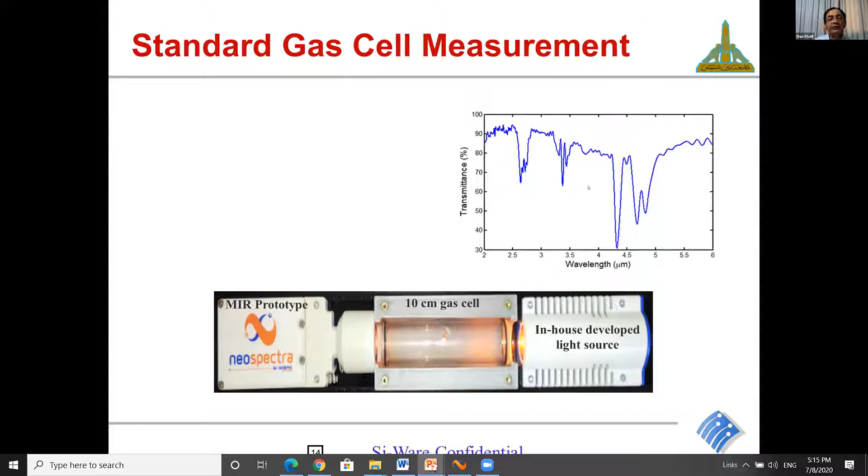You can also do the measurements in free space to monitor the variation of the CO2 or the H2O vapor and so on. I'm focusing on the gas analysis because our project is on building a gas analyzer.

And this is an experimental setup in which we have a gas cell, a huge gas cell, very small spectrometers here, and the light source on the other side. The light is going inside the gas cell multiple times, then goes to the output. And we can control the amount of gases inside the cell, the different gases, through different valves, classical valves, and so on.

The experiment can be controlled by the laptop. In this experiment, it's connected to the laptop, and everything is controlled on the laptop. However, we need to develop also all the controlling parameters, the pneumatic parameters, to control the gases going through the gas cell, in and out of the gas cell, to be compatible with the complete cell.

But we also have the intention to build, during our research project, an integrated gas cell with small dimension. This will allow also to have a very small overall size.

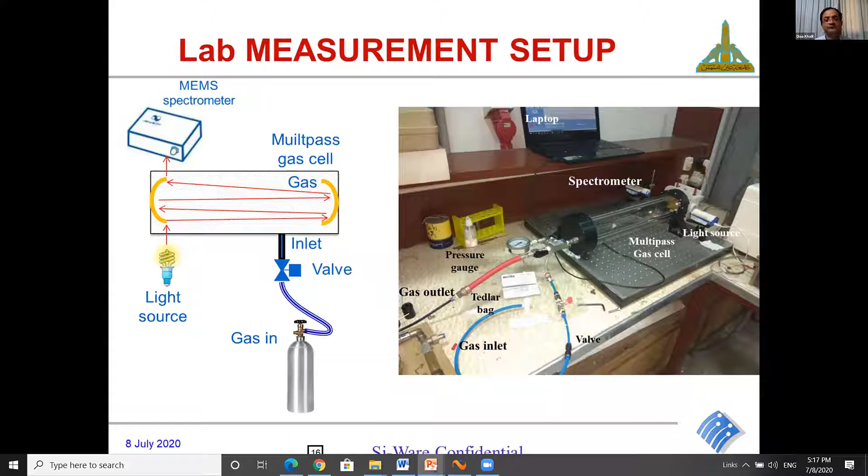The second version of this spectrometer is done using some optical reflectors, optical molds, to be compatible with small dimensions. You have the light going in and out, and the detector is replaced by some dye detectors and so on. And then we have everything in a very small chip.

This is the chip, which is few centimeters by few centimeters. Inside this chip, you have the optical head, the electronics also for the driver, for everything, and the optical core modules, which replace the optical fiber for guiding the light in and out of the chip.

And this is typically what we can do with this chip with a Raspberry Pi. We can connect this chip with a Raspberry Pi and use it to test different materials, for example, for food analysis, caffeine analysis, for polyester and plastic analysis, and so on. And everything will be connected to the computer to transfer the data and make the data analysis later on.

Unfortunately, we have been shortened in time, so we were not able to send the small chip to Professor Hunter. It was planned to have it in these demonstrations, but we didn't get enough time, it seems. So I hope it will arrive maybe next week or something like that. Due to COVID-19, the transportation is still a little bit complicated.

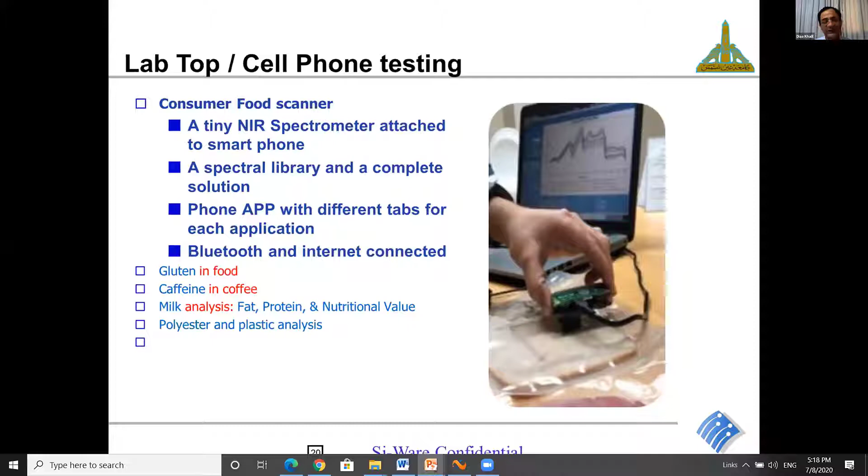During the presentation of Professor Hunter, I was thinking about two big phenomena that are interesting for me. First, the system dynamic analysis is very close to what we do in electronic analysis—signal processing, Laplace transformations, Fourier transformation, convolution and deconvolution. These are the tools of the electronic domain that we use for circuit analysis and teach our students. So it's interesting to see that in mechanical engineering they use the same language and tools. That's very encouraging for me.

On the other side, I've been thinking about another option that could be interesting, and I'll discuss it with Professor Hunter if he has time. With MEMS technology, we can build a complete platform with different mechanical components—diaphragms, cantilevers, things like that. We can measure micro displacement through capacitive sensing techniques, similar to spectrometers, with a suitable optical system over these microsystems. Students can study micro phenomena easily, either microfluidic or micromechanical, since there are many phenomena that appear at micro scales, like friction with air layers in comb drive actuators.

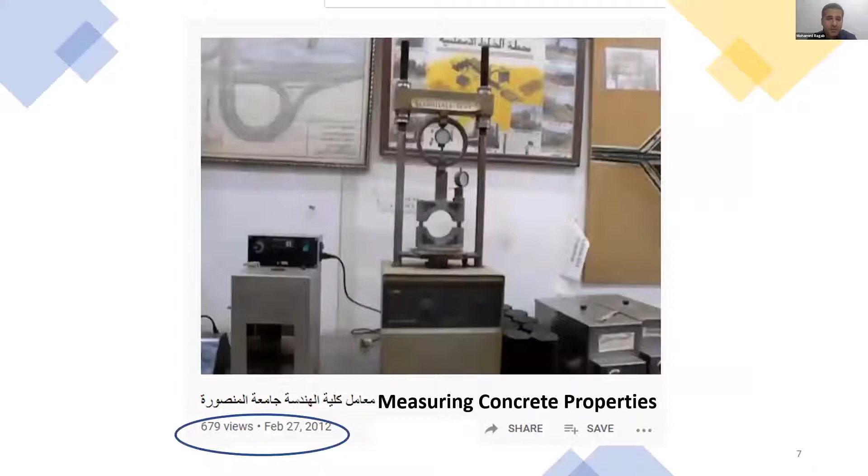Other screenshots show uploaded lab experiments for second-year civil engineering students since 2012. All the recorded experiments are accessible for all students in the faculty. These are the recorded experiments.

Now I'll talk about mini projects. In the Mechanical Power Engineering Department, students by themselves started installing their mini projects at home before COVID-19. We divide the students into small groups of around 5 to 8 students each.

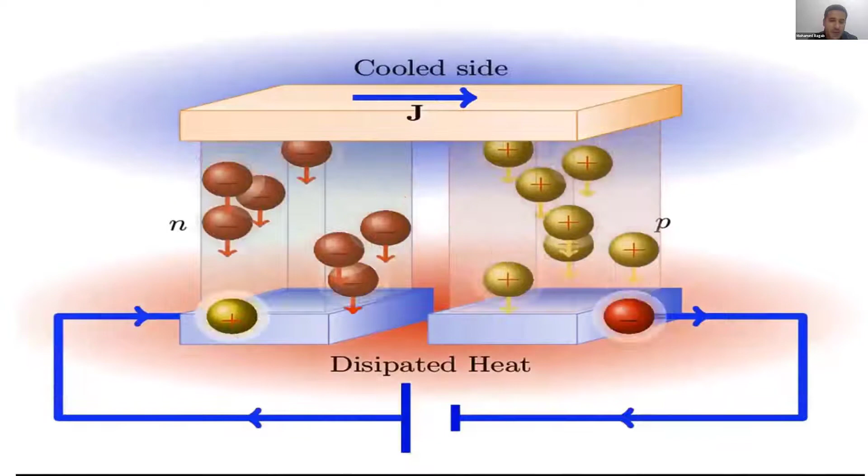They can choose one idea related to the curriculum, and after discussion with the instructor, they start to manufacture and assemble the device. During this, they have to make videos for each step until they reach the final product.

Here are some examples of mini projects students made by themselves at home. They start with the components, then make short videos for the manufacturing process and the final test or testing step for the device.

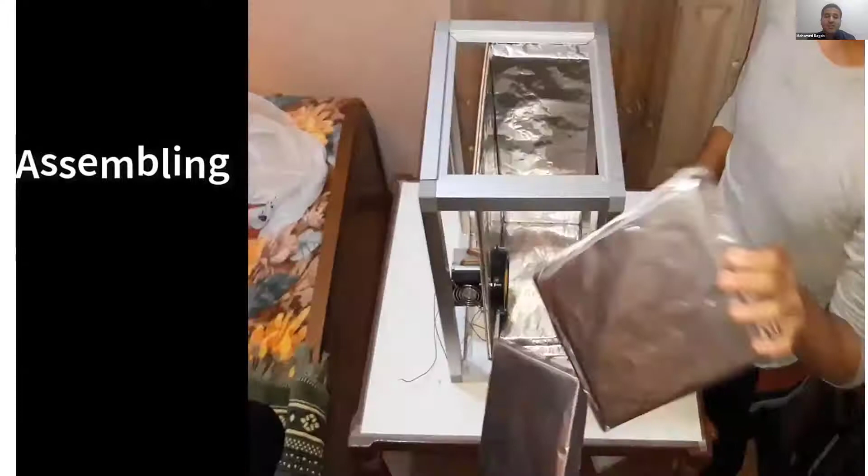These videos act as tutorials for future students, a peer-to-peer learning technology to teach them how to handle mini projects at home. We have some groups.

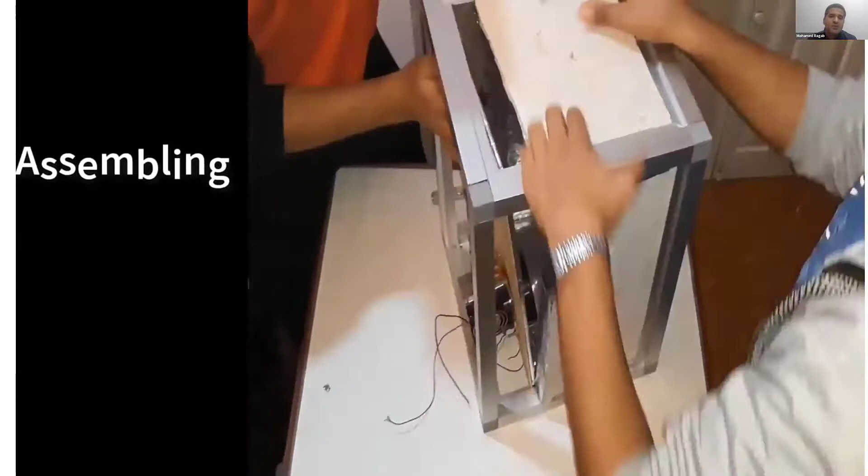There's collaboration between mechanical students and mechatronics students to make some devices with remote controlling, but all these devices are still under development. Here is a test of the device.

We also have mini projects such as an air preheater project, with screenshots here, and an orifice flow meter, showing the components, the final product, and the test. Here is another project to measure RPM of a motor.

All these projects started before COVID-19, but now... Dr. Ragab, I think there is a problem, the screen is static. I know you have videos to show, but your screen is still on the first slide.

Not for me, I saw all the videos. Yeah, I have seen all the videos too. Yes, we see them clearly. Maybe only for you, Dr. Nabil. Please don't disturb Dr. Nabil, let Ragab speak.

Okay, all these experiments and mini projects were before COVID-19. Now I'll talk about what we did in Mansoura University after COVID-19.

After COVID-19, we also did recorded experiments. After the lockdown, the faculty started recording all the experimental work required from students during the spring semester, and made it available on the university website, since students were not allowed to enter the university and could follow up their required experiments online.

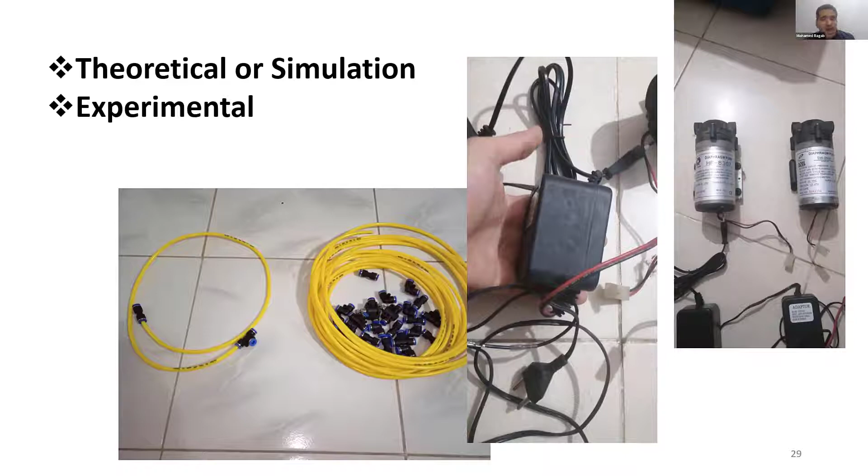For the next semester, we will talk about virtual labs. We started preparing for it based on hybrid learning because of the expected limited capacity, so one of the most important directions is making use of virtual labs technology.

We started by making a list of open source virtual labs related to the energy field, around 20 virtual labs here, and another 20 here, with some examples of making use of virtual lab technology.

We also started making a list to prepare to buy some virtual labs to be available for Mansoura University. The faculty started collecting data from all departments to prepare a database for virtual labs accessible to all students. Now we'll talk about on-site experiments. As I mentioned, next semester will be based on hybrid learning, so some decisions have been considered.

Students' attendance will not exceed 50% of regular attendance before COVID-19. Students will be divided into small groups, and the new software will be bought either by the university or by the faculty, among many other decisions.